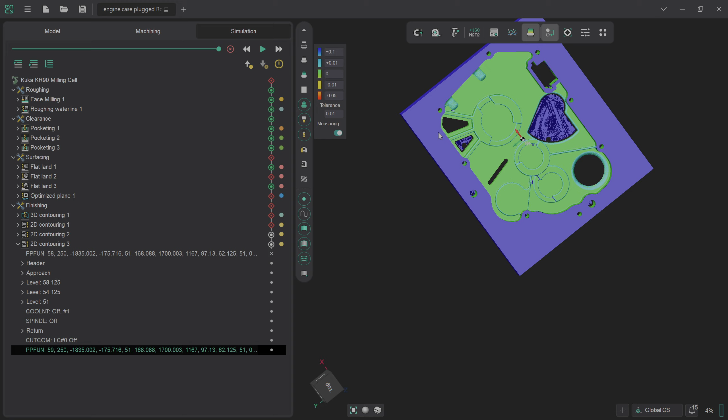Right, so we're going to finish up the cleanup on this part now. We're going to do the mating surface finishing and then exterior contouring, and there's a small amount of non-planar stuff that we need to work on as well. So we're now going to go back to the machining environment, and first we're going to check the original face milling information that was there.

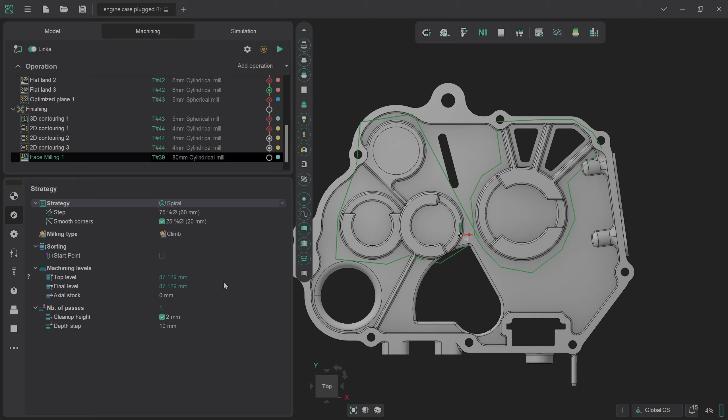So 87.129 would be the top level that we'd be working to normally now. So if we now go back down and generate a new face milling operation, happy to leave it with the 80mm cylindrical mill, that's absolutely fine. So we're leaving 0 stock, we're setting that to 88 as the top level since that's what we worked to before. And we will change the 6th axis control, and we'll now give that a second to generate the toolpath that it needs.

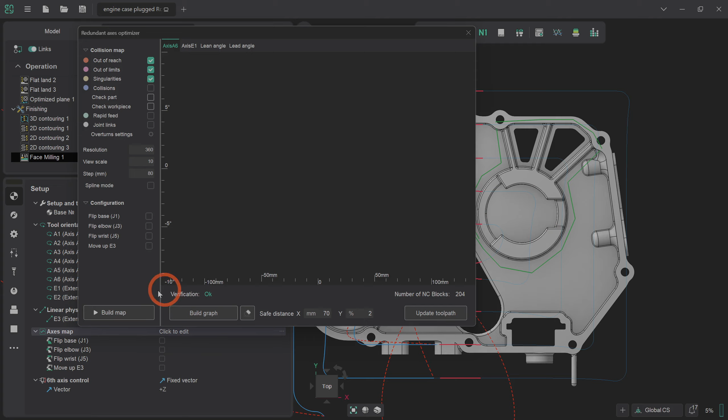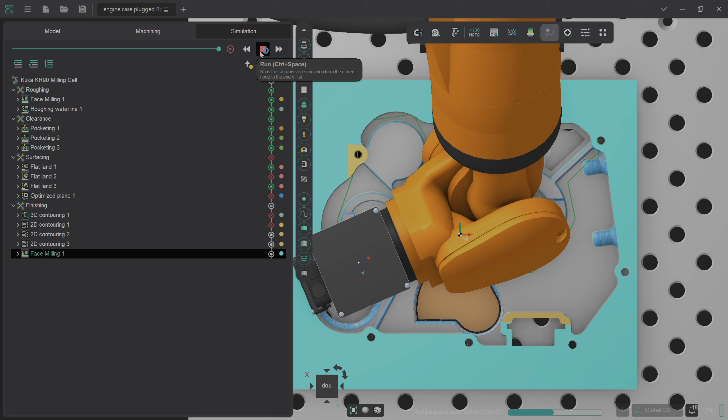Quickly go through the axis map just to divert ourselves from the problem that it throws, and that should now bring everything down to the green height that we need. So we're going to very quickly simulate this last path now. Just give it a second. Okay, and we are very, very slightly off the green height that we want. So I'm going to quickly measure that difference.

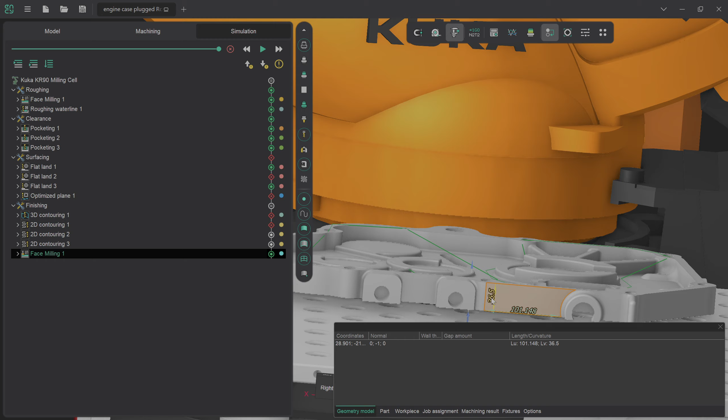That's 36.5 there. So realistically, that means that we want 86.5 to be the final height. So that's what we're going to now set. 86.5. And we'll recalculate that. And we'll resimulate that just to make sure.

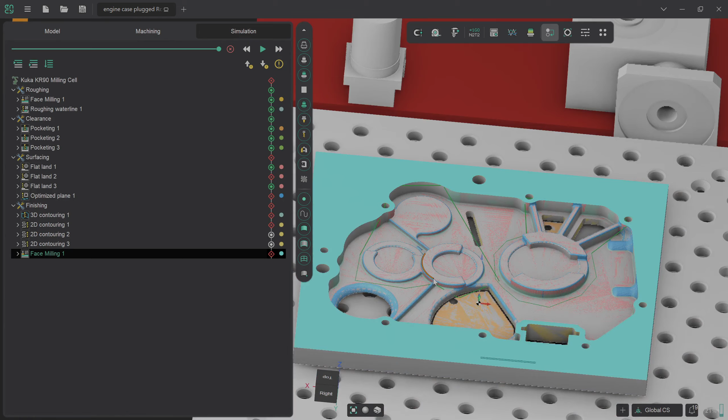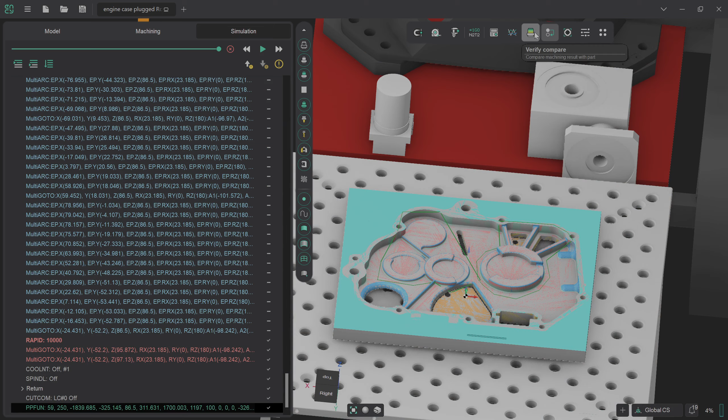Right, you can see here, without even turning on the colour comparison, we've got the grey just peeking through the blue here. So this tells me that we're pretty much at the ideal height that we need to be at, which is great. So we'll just turn on Verify Compare. We've got a nice green set up there, so everything's within tolerances.

That's perfect. So we're going to go back to machining now, and we're going to do a 2D contouring path around the outside of here. So we'll go for 2D and contouring, and we'll stick with the 80mm cylindrical mill for now to give us some nice extra space to work with. We'll set the bottom layer to 51mm just so there's a little bit of material to cut away with a more detailed contour path at the end.

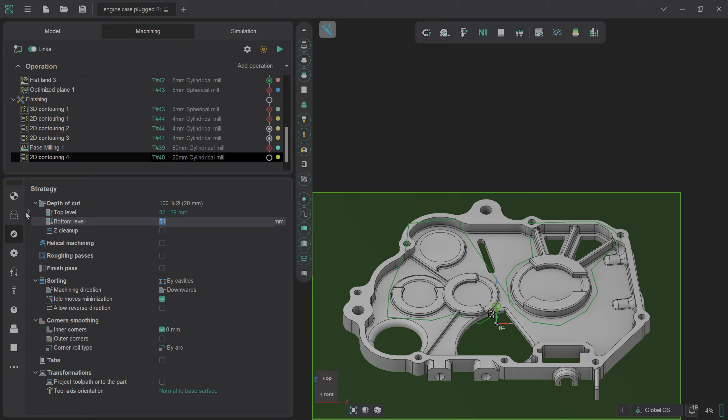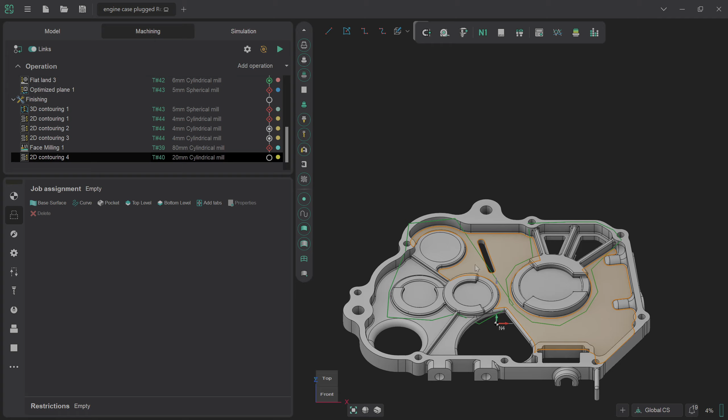And we need to be able to generate a boundary path for this, and we can't use this top edge because that obviously doesn't account for these sections, and we can't use the bottom edge because there's clearly a cutaway there that we haven't accounted for previously. So there is actually a trick that we can use at this point. If we go back into the model environment, we can grab the projected boundaries of the actual object. So if we do that now, you can see there's now this lovely curve here that's a perfect boundary range for the entire object itself.

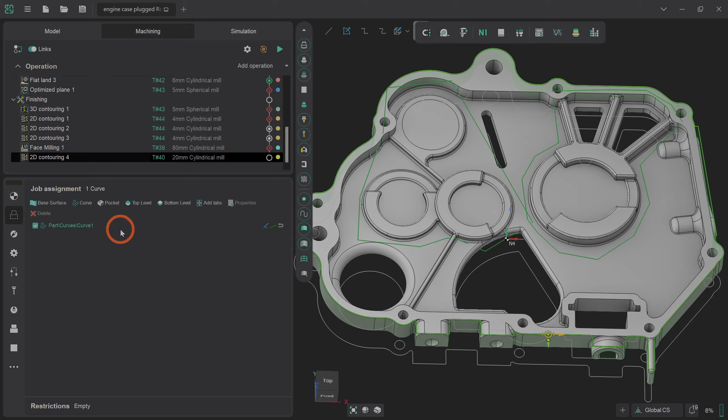So we go back to the machining environment, we grab that curve, we tell it that's the curve we want it to machine to, and we tell it that we want it to machine outside of that curve. We can now set that up as a toolpath, which should hopefully give us plenty to work with. Start point in collision failed safe distance test. Okay, so we go with helical machining, that should resolve that problem. If we now go with the axes map and sort that, we should be good to go.

So we've now cleared all of the requisite area surrounding the object. That's ideal for us. So if we quickly simulate this, just to double check, we can see now that that gives us enough clear space to be able to work with clearing up these blue regions that we need. So let's get on with that.

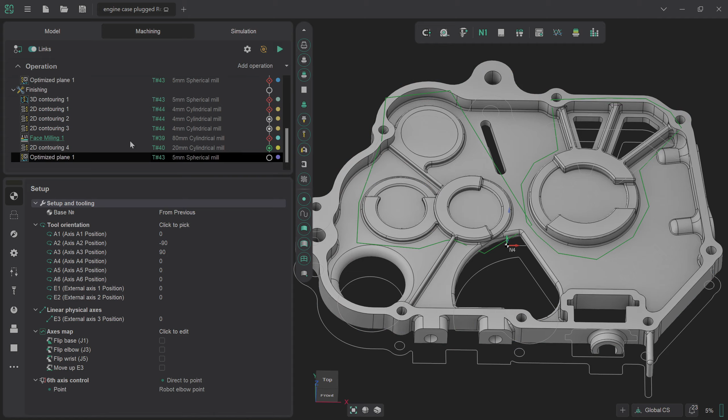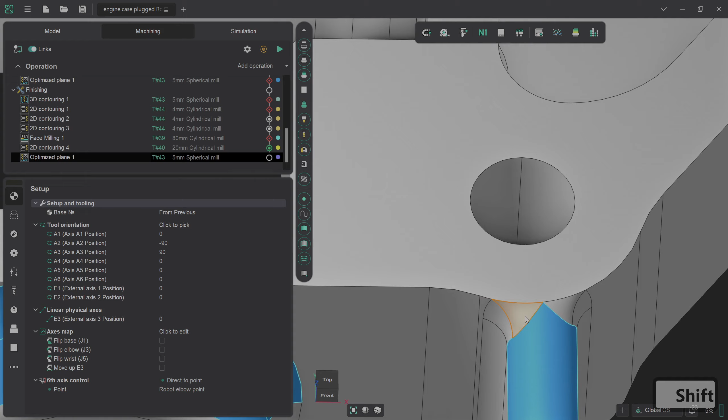So I am going to suggest that we go with a 3D optimized plane again, not complex plane. And we grab each of these relevant non-planar regions. We're not going to go all the way down the sides on them because we're going to be doing a profiling pass that'll do that for us. But if we just grab each of these now, and we'll do all of the transitional sections. I'm going to leave this side one for a second because that's going to take a little bit more work to achieve.

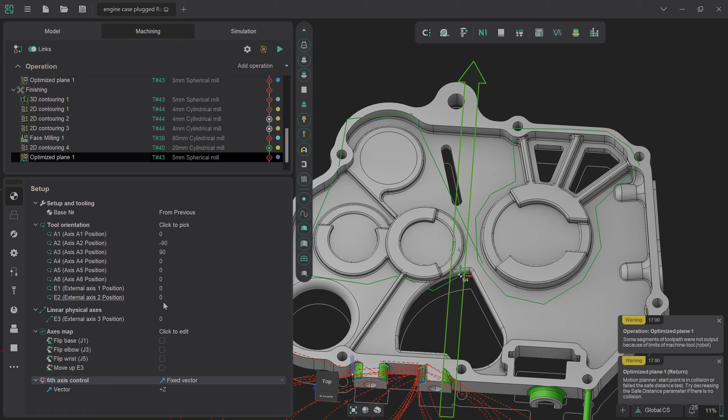But we set these as the faces that we wish to machine. Okay, that's fine. That's all fine. We've got the correct tool. We'll set this to fixed vector. And we click on generate toolpath. And then do the obvious axes map element. Build the graph, update the toolpath.

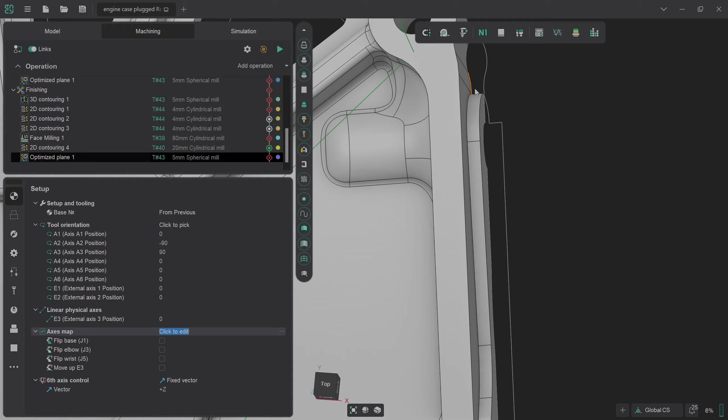And we now have these nicely cleaned up areas. So this means that we've now got all of these external non-planar surfaces covered. That's great. We're going to do something similar for this, but we need to be aware of the fact that A, there's no fillet here at the edge, and B, this is actually a very, very shallow shape. So we can try adding it to what we've got here already, just to see what it comes up with.

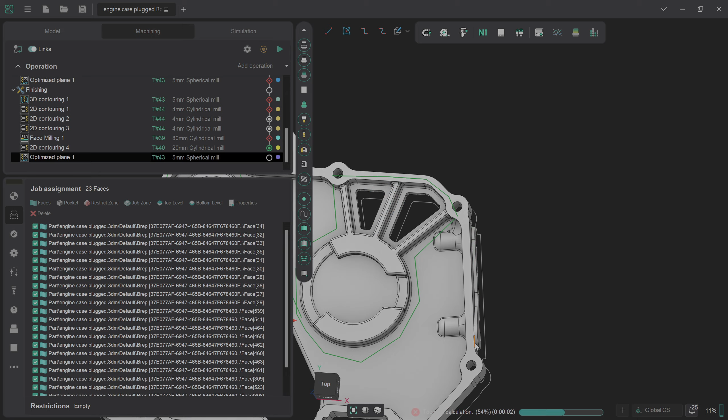It may be close enough, but it might also be that it starts to complain a bit. So if we have a look at the simulation results for this now, I'm fairly confident that these are going to come up okay, but this is the bit that I'm unsure about.

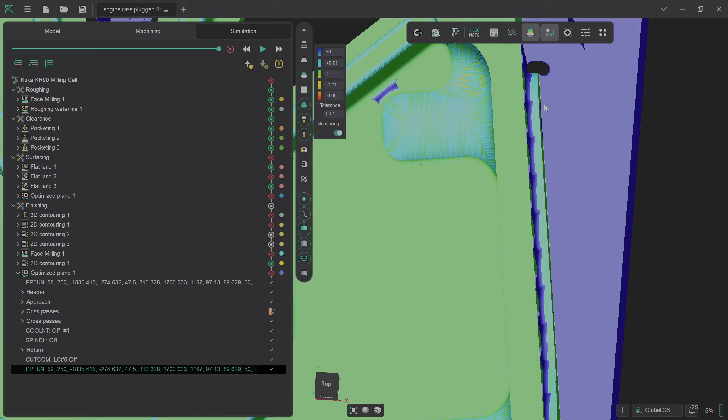Okay, I stand corrected. That's actually pretty good.

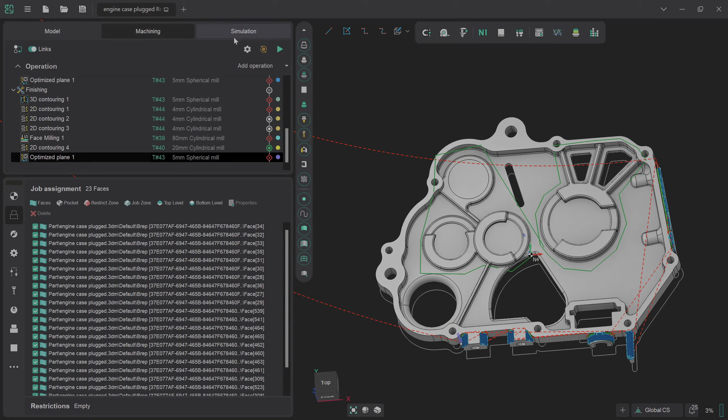I will set up a contour to go through here just to clean this up though. And we'll be doing a closer contour around all of this as well anyway, which should pretty much see us done with this project. So, to set up the finishing contour around the actual piece, we are going to go with another 2D contour.

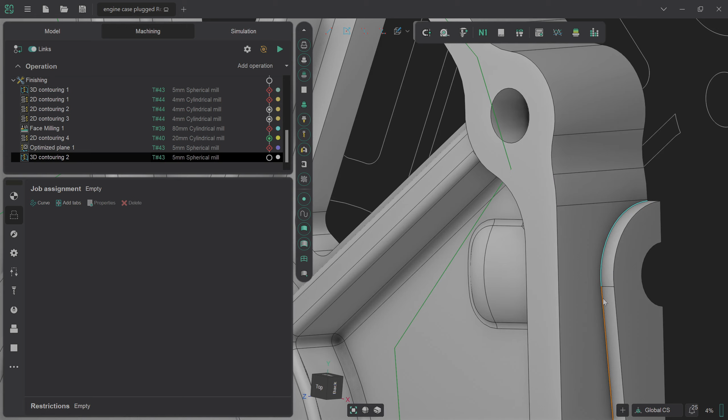However, before we do that, I'd quite like to get this bit finished. So let's set up the 3D contour first. And the curve that we're going to use is going to be the same one that defines the surface of this. So go with that, and that should give us a nice clean line.

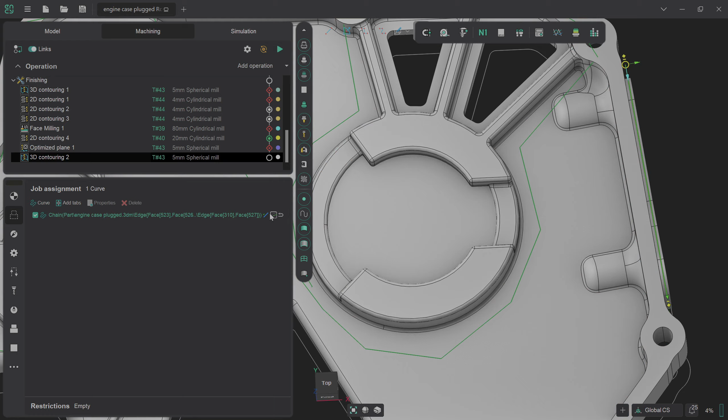So that's the curve. We use the 5mm spherical mill as well. That's absolutely fine. That's going from the outside. Yep, that should be okay. So we set that to fixed vector and run.

And we just double check the axis map in case there's anything it's complaining about. The toolpath, and we quickly simulate this at this point just to make sure that gives us a clean end result, which it should do.

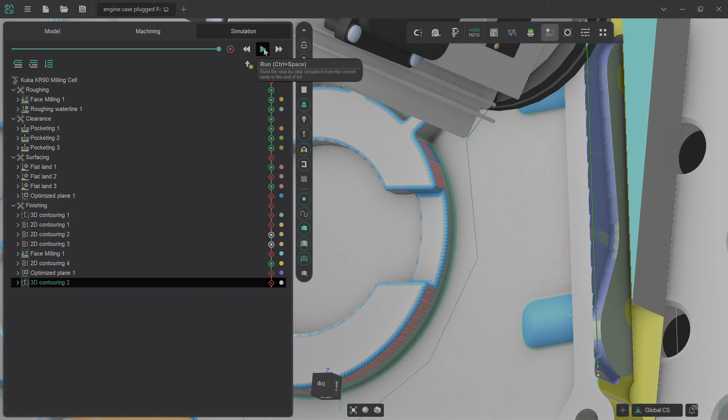Okay, so this is the problem that I was worried about with this. Basically, we end up with some very strange resolution around here, and we've got also this part where it's digging in along here. This is going to be a problem with contouring this however we do it.

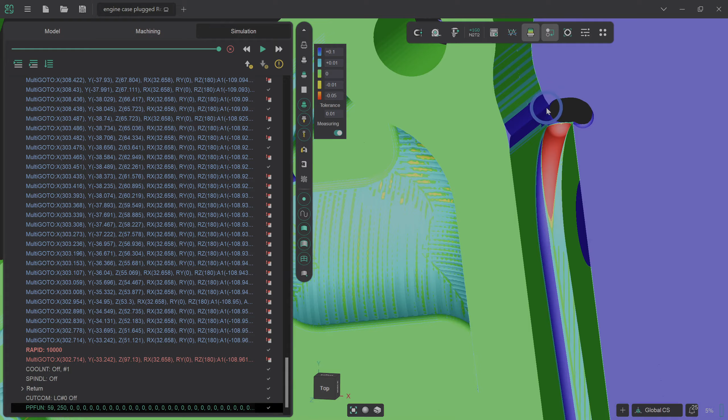So realistically, it might not be a bad idea for us to leave this for the moment. Or alternately, we can probably try a different approach, just machining along this edge, but as I say, it's something we should come back to in a bit.

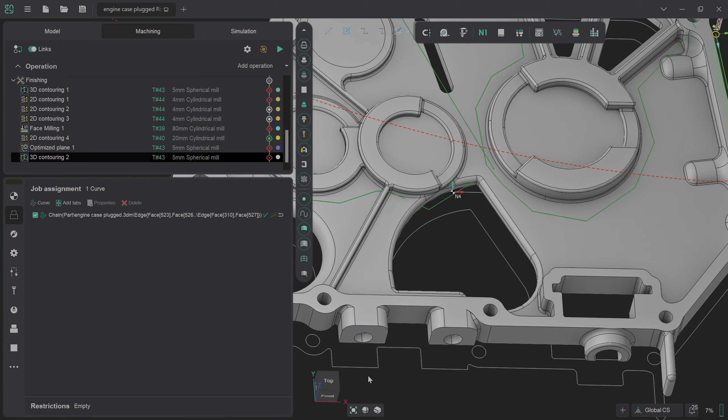The contouring around the exterior profile, however, we can absolutely do. So I'm going to delete this for now. I'm going to set this here. And if we generate that toolpath now, we should get a nice clean result for the final finish.

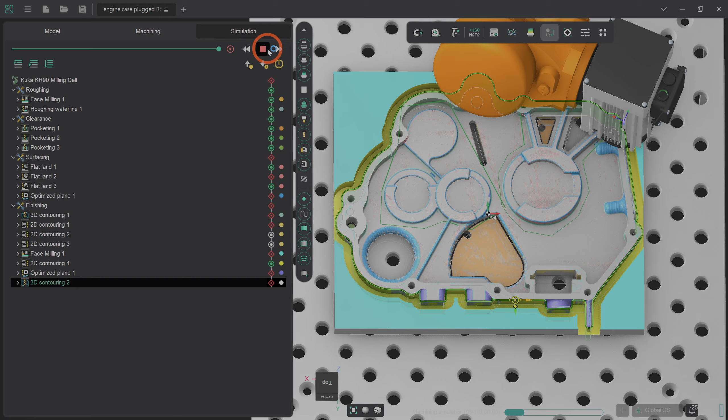So we just rerun this. We'll see that we've got, there's a few little bits here that need clearing up, but that's not the end of the world. And generally all around, all is good.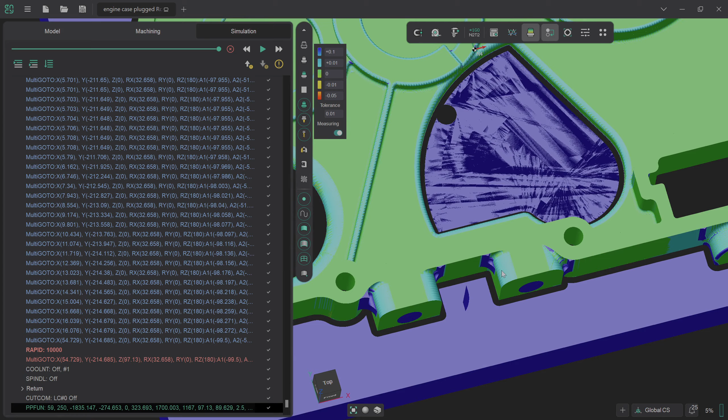So the parts that we need to revisit, we need to look at this section here, and we need to look at these sections here. Now the good thing is these sections here can all be addressed with the optimized toolpathing that we're dealing with. So let's do that now.

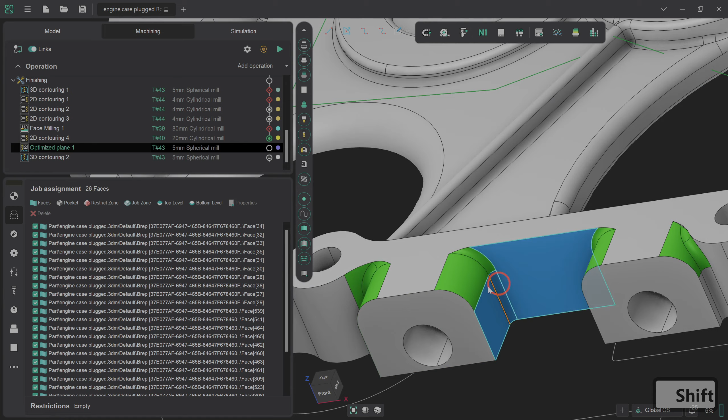So with the optimized plane, we can quite easily bring this down to here. So add those faces, and those, might as well add those faces whilst we're at it.

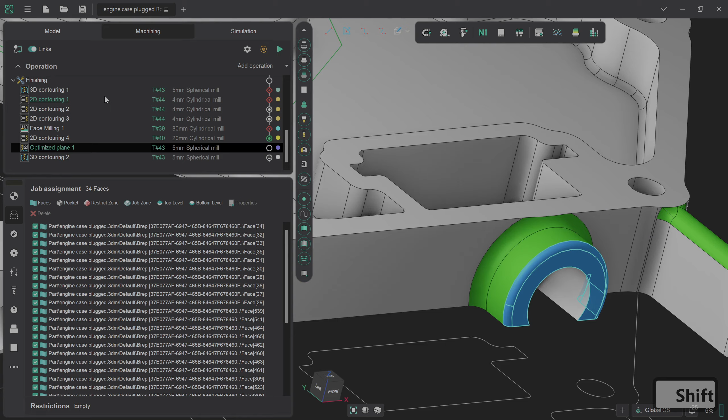And then come around to these faces. And then finally these ones. So the quick recalculation of that, we should be okay.

I'm thinking actually we might be able to get away with remachining like this on here. So let's try that. So regenerate that.

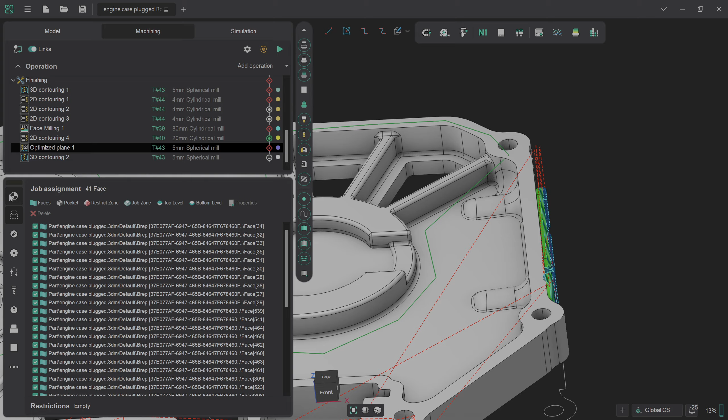Allow it to have a think. Double check the axis map just in case there's anything unexpected that's manifested, which it hasn't. This is great.

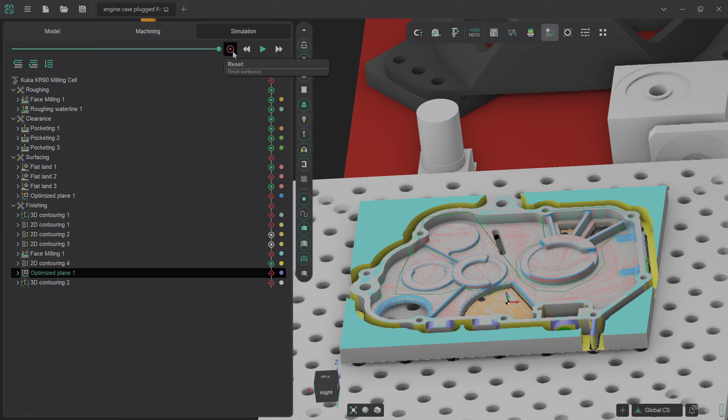So we build the graph, update the toolpath, and then if we go back into the simulation space and we reset the simulation and then simulate up to the current operation. So this will take a minute, so I'm just going to pause the recording whilst it works it out.

Okay, that's all gone back through without any problems. So we can now run the optimized plane and 3D contouring. So let's quickly do that.

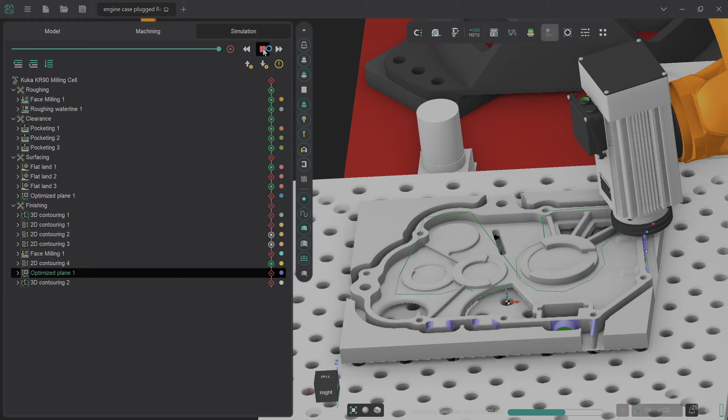So you can see now how there's markedly less there that needs to be cleared away, although still some. So we're going to have to incorporate some of this plane as well in this just to really clean this up. However, over here there's no problems of note.

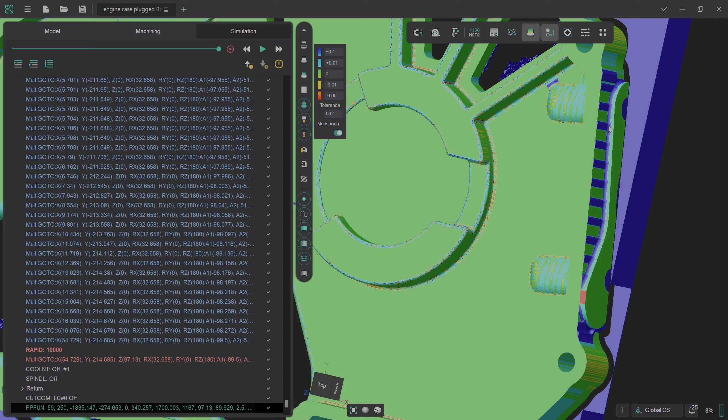There's just this tiny effect here, and this is looking drastically better already. There is still a small amount of extraneous ribbing there, which is not ideal, but for the moment what we're looking to avoid is this red cutaway section.

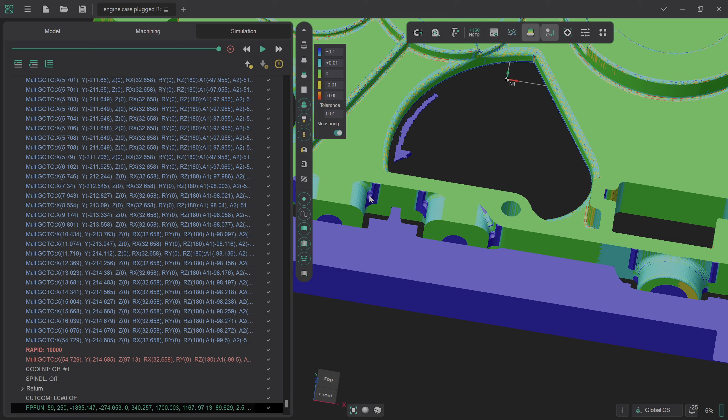Now this actually happened as part of this plane motion here, I believe, so that's the reason for that. That's just poor model definition. But this section here and these bits here, these can all be cleared.

So if we go back now and we go back into the optimized plane section, yeah, that's clearly not going to complete it. So I think what we're going to have to do is we're going to have to add another 3D contouring in here. So if we duplicate this...

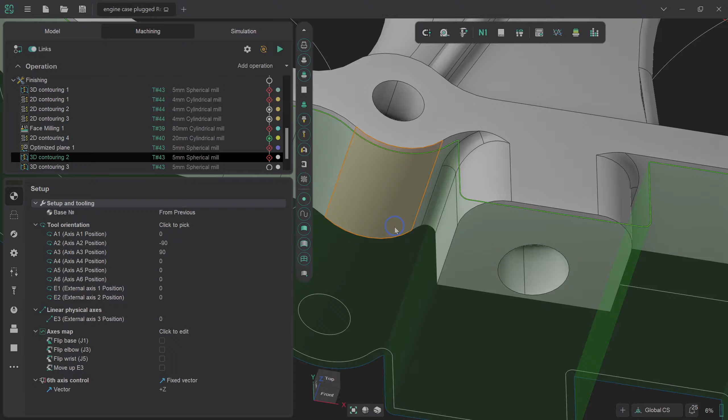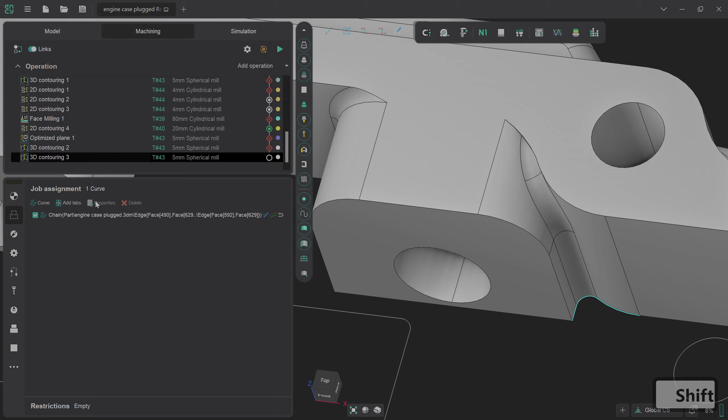And we tell it that the lines we want it to correspond to are just these ones here. So add that curve and add this curve as well. That should hopefully resolve the bulk of that.

So yes, you can see how these are now drastically cleaned up. We'll do the same for these interior sections here as well. We should see that pretty much done.

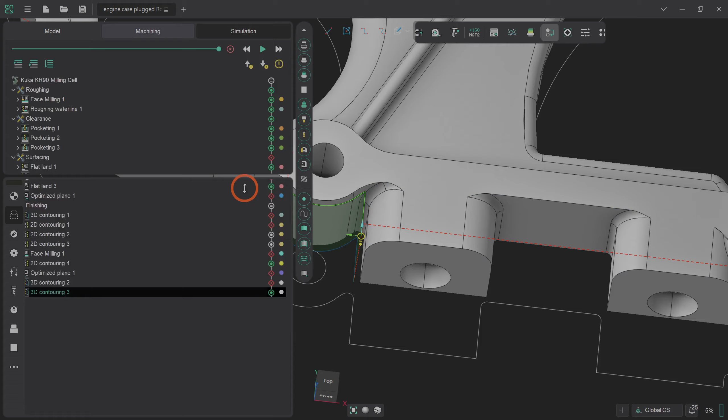So we define this curve as well. Set it up to the middle there. Run that through.

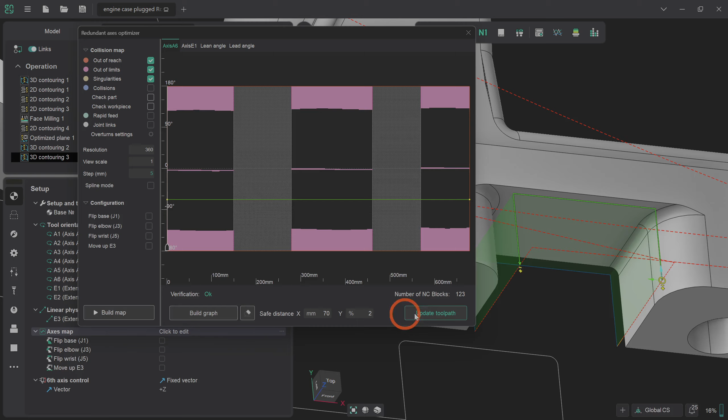And then simulate these three. We've now got these nice and clean and in accordance with what we need. So that's ideal.

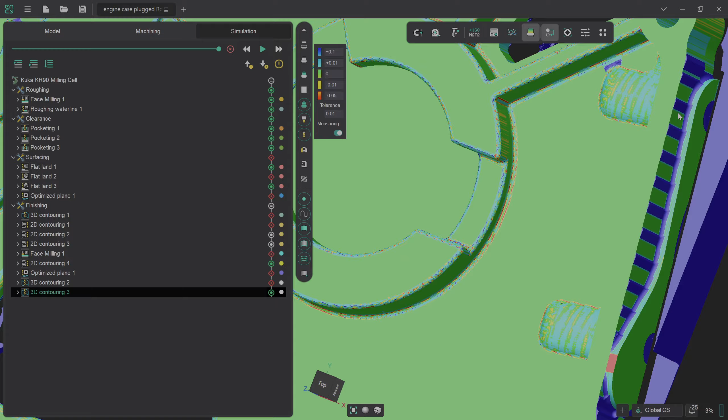This is going to be a bit more of a fight. We'll try and follow the 3D curvature for some of it. But I think realistically we've probably reached the limit of what we can achieve on this for now as a 3-axis operation. So we'll run in this small cleanup area here, and I think there's another one over here as well, and that will see this project pretty much done.